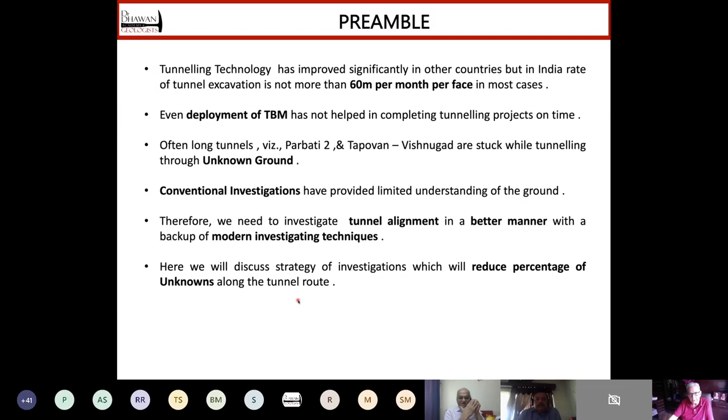You take any tunnel, you will find three prominent categories after you complete your geological investigations. Few reaches of tunnels will be well known to you. You would know what type of rocks are expected, what would be the jointing pattern in these stretches, and how they are going to behave. So these are the known areas, and we call them known knowns. These can be dealt with by good design and proper planning of excavation.

In the second category, in some reaches of tunnel, you would know the problem. Problem is known to you, but where it is going to occur is not known to you. These should be mitigated by appropriate contractual architecture.

But the third category is dangerous, where you neither know what would be the problem, nor you know where it will occur. And these are the most dangerous situations, and Parbati was under one such situation where water with very high ingress with lot of silt appeared suddenly, and the TBM got submerged.

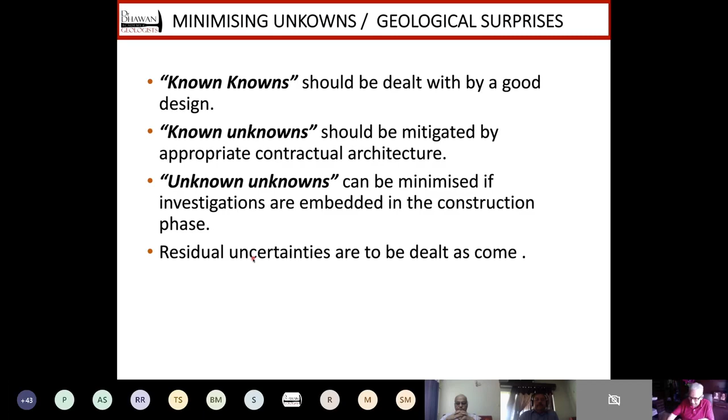Having understood what we are confronted with, I would like to give you through this picture an idea of where we start. This is a picture from Bhutan Himalayas, Chamkarchu project, which we investigated between 2010 and 2014. I was a member of the team who initially visited this, and this was the proposed tunnel alignment by us.

You will see the area is totally inaccessible. There is complex geology, which is very common to all parts of Himalayas. You can hardly see any rock outcrop. You cannot do deep investigative drillings because of poor accessibility; how will you take truck-mounted rigs? So there are problems and problems. So how to resolve them?

And you should really understand how scanty is the data based on which we try to prepare a geological section, and then we do rock mass classification, and from there we plan the entire excavation and support design of a tunnel. So therefore I say how little we know. So you can yourself understand, from 2 to 3% of rock outcrop, you are going to make 100% prediction of the geology along the tunnel alignment.

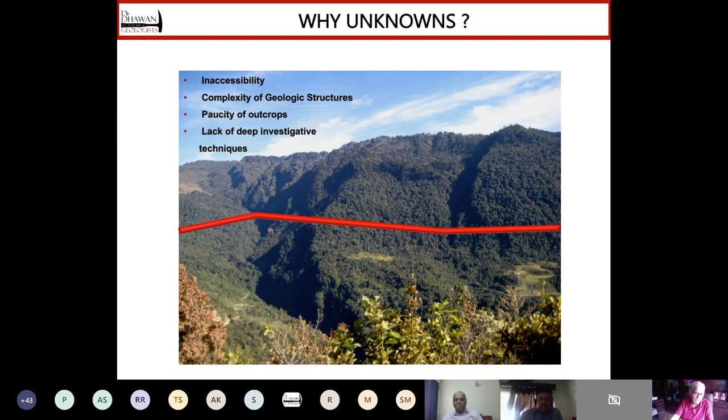From that kind of a hill, whatever outcrops you can measure or traverse, which are humanly possible to visit by a geologist or a group of geologists, you will try to interpret a geological section along a tunnel alignment, which will look something like this in every tunnel, where with these colored symbols we have defined types of rocks. We have also tried to understand the structural features, particularly thrusts or faults in Himalayas. There is a fold also you can see.

So even if my geological understanding through whatever mapping I have done is correct, I can estimate the type of rock which is going to be intercepted. Suppose my pointer indicates the tunnel alignment; you can estimate the type of geology, the type of rock along the proposed tunnel alignment. But within a particular rock, it is highly unlikely that it will be uniform throughout. There will be changes in the jointing pattern, joint spacing, nature of joints; then holistically the structure will change.

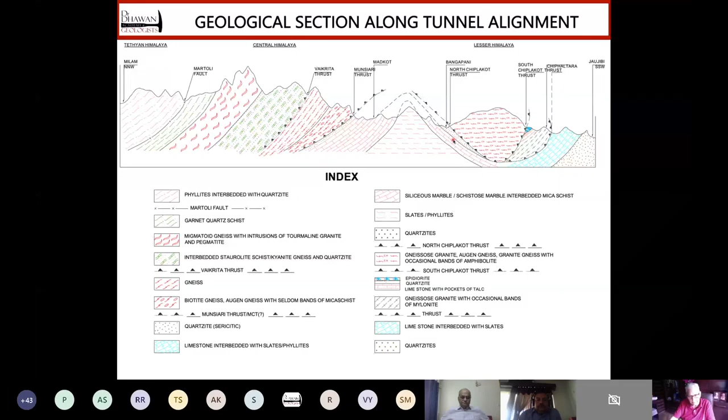Suppose this band of limestone on this limb of the fold would be different than the other limb of the fold. So geostructurally, these are different. So it is not appropriate to judge the behavior of a rock mass purely based on our geological assessment. We must bring the concept of geostructural unit into it.

Now, after doing our geological mapping and making the section, we conventionally make an attempt to understand the rock mass with help of some rock mass classification. For example, here in this case, it is RMR. You will see prominently there are two kinds of rocks, and for each sector, the geologist has done rock mass classification. So based on the outcrops which he has measured on the surface, which are very few in number, we are trying to predict behavior of rock mass in the entire reach, and we are trying to assess the rock mass classes in percentages through these pie diagrams for all the three sectors.

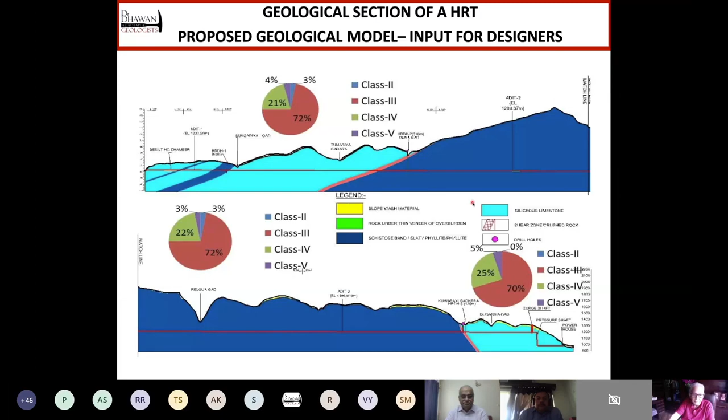So you can yourself imagine, when you construct the tunnel, excavate the tunnel, it will be a surprise if this kind of classification will totally come true.

Based on my experience, I divide the expected rock masses along a tunnel alignment into three categories equally. I mean, it is my own assessment that about 1/3 of the area falls into the known knowns, 1/3 in known unknowns, and the balance, unknown unknowns, is also 1/3.

What are the tools at our command? And what is the concept of investigation?

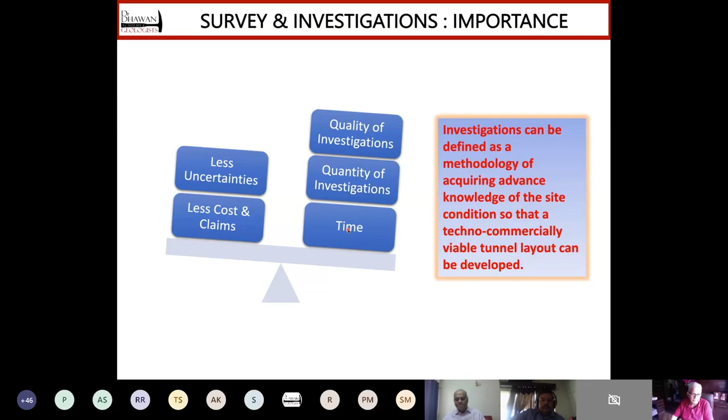And with this background, we can certainly say, and it's common sense, that if we do good quality investigations, adequate investigations, invest proper time and money on this, we will face less uncertainties and less cost claims. So why investigations? Or I should say, why do we need a strategy for investigations? To develop a dependable geological model. I showed you a section. That section, before we start making our DPR, should be very well frozen. And this will happen only after you develop a dependable geological model.

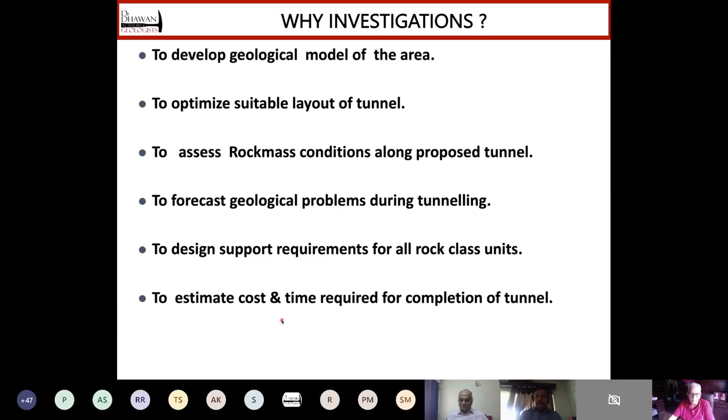If you have a good model, you can optimize the layout of the tunnel. And your assessment of rock mass conditions along the proposed tunnel will also be dependable to a certain extent. And our basic aim to do investigation is to forecast geological problems during tunneling. And finally, to design the support requirement for all rock class units which are expected. Once we do this, we will be in a position to prepare a dependable cost estimate and time required for completion of the tunnel. Not only that, we will be in a position to choose the right kind of technology for tunnel construction.

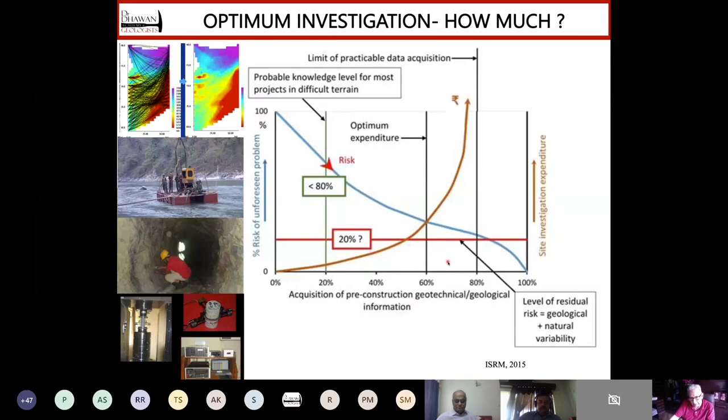And beyond this, you will find that the brown curve becomes steep initially and then almost vertical. So it means you can't cross beyond 80%, whatever you may do. It means 20% residual uncertainties will always be there. So that is the level of confidence on investigations. And therefore, initially you have to do a good investigation and then plan a contract in a manner so that you can intervene in between and there could be some mid-course correction. We'll talk about that.

Exploratory drilling, which is most important, is done, but minimum. In my opinion, in the Indian context, it is just lip sympathy, and we do some drilling only in low cover reaches, nala crossings, or where we anticipate a major geological problem. I have not seen any deep drilling for any tunneling project as yet. We do good drilling for dams and powerhouses, but not for tunnels. And then we apply some amount of geophysical investigation. We'll talk about it. And rock mechanics testing.

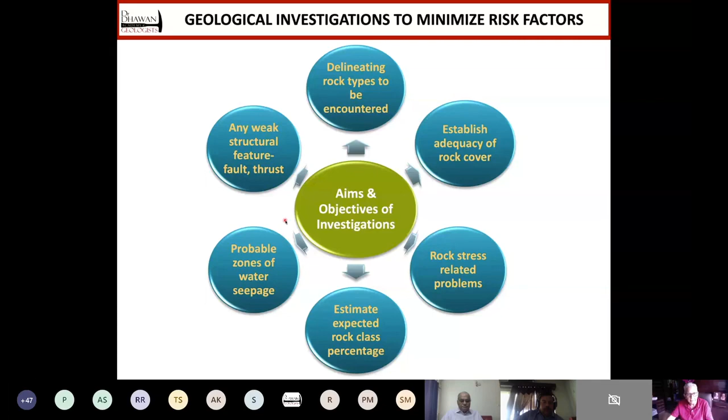The basic aim is to delineate the rock types, to establish adequate rock cover along the alignment, to estimate the rock stress, estimate expected rock classes along the tunnel alignment, probable zones of water seepage, and any other structural feature. So this is our aim, this had been our aim, and this will be our aim in future too. The only difference is more seriousness, or a systematic approach by integrating advanced techniques of investigation. What are these advanced techniques? LiDAR-based mapping. It is a quicker method, and particularly wherever the area is totally inaccessible, it is helpful.

Airborne geophysical surveys. These days, all NHAI contracts are asking for EM surveys, airborne geophysical surveys. We have yet to see results, but I'm very hopeful that this is a very, very important step for improving quality of investigations. Then the drilling, directional drilling, which can investigate the medium below the Nala beds, below the river crossings, in any kind of tough geological condition.

And one of the best examples which I know is the Gotthard tunnel in Switzerland, where a marl band, which was very thick, was investigated with help of about 1.5 kilometer long drill hole. And then during construction, tunnel seismic prediction system is very useful. In NHPC, where I initially served, we had been using it at several projects.

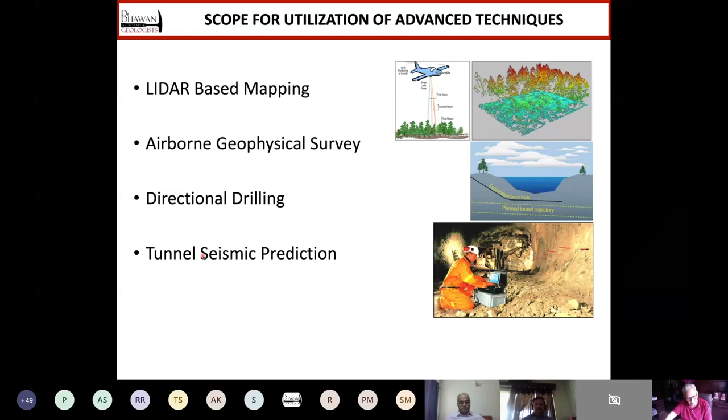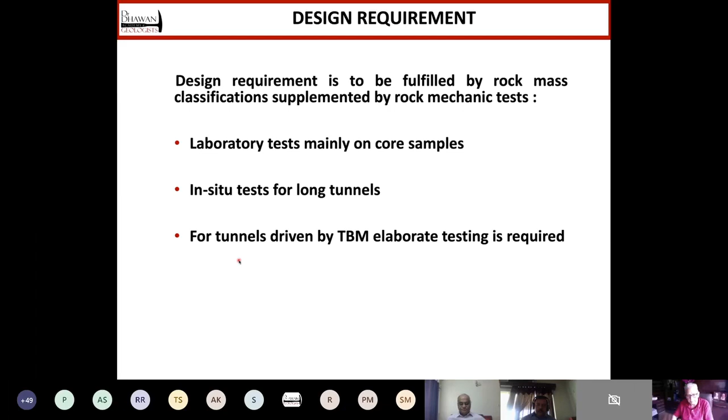To cater to the design requirement, we will have to do extensive laboratory tests, mainly on core samples, which we will either collect during the geological mapping or from the drill holes. In situ test for stress measurements along the long tunnels, and then if the tunnel is to be driven by TBM, elaborate rock mechanic testing is required.

While focusing on other investigating techniques, we should not forget RMR and Q system. There are so many others, but the Indian geologists are somehow more convinced with these two classification systems. These are very important tools, particularly during the investigations. And this is one tool which remains useful to you from preliminary state of geological mapping to the advanced state of geological mapping, tunnel stage, support stage design, and also during the construction.

Originally, these methods were designed for estimating tunnel supports, and later they were extended for assessing the rock mass properties as well. Nowadays, there are several empirical equations which help you to understand rock mechanic properties; if you know RMR or Q, you can assess C, phi, modulus, and other properties of rock mass. And both the classification systems provide a realistic estimate for numerical modeling purposes.

But my suggestion is that we should keep a check. We should try to correlate the values we get from RMR, Q or Geological Strength Index, GSI, which is established by Hoek, with the actual rock mechanic testing program, so that our estimates do not go haywire. So some amount of testing is required during the DPR stage, so that we can use those figures for our designs.

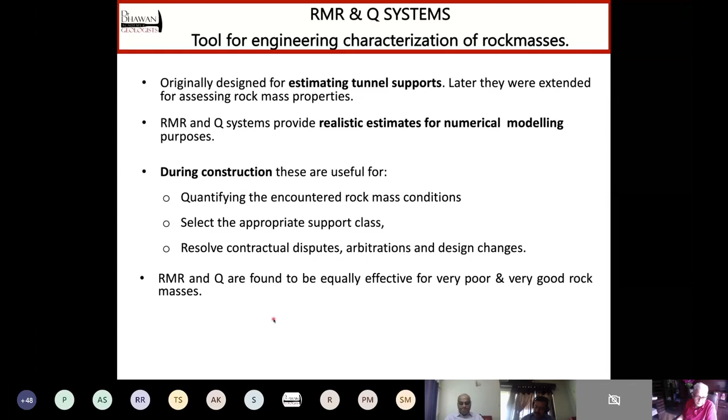And both the methods are useful even during construction of the tunnels for quantifying the encountered rock mass conditions, select the appropriate support class, resolve contractual disputes, arbitration, and design changes. Many times people ask which one is better, RMR or Q? I think this question was asked to Barton and Bieniawski both. So both have written a paper in 2008, wherein they have stated that RMR and Q are found to be equally effective for very poor and very good rock masses. So for the entire range of rock mass, these are useful.

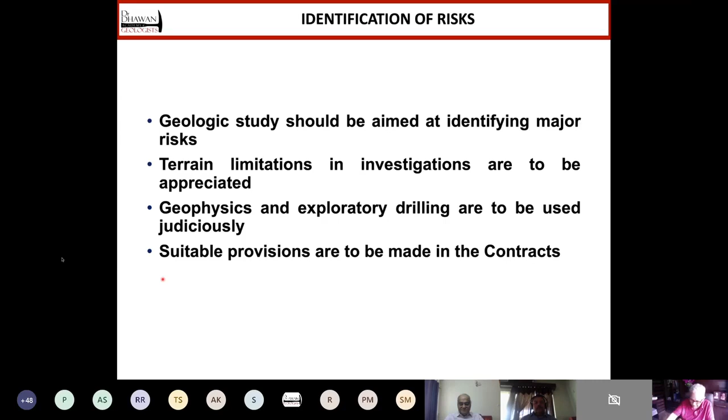So now the risk identification and management. Geological study should be aimed at identifying major risks, but at the same time, terrain limitations in investigations are to be appreciated. Geophysics and exploratory drilling is to be used judiciously, and suitable provisions are to be made in the contract. These are the four, you can say, mantras for risk identification. And we must do it before we start construction.

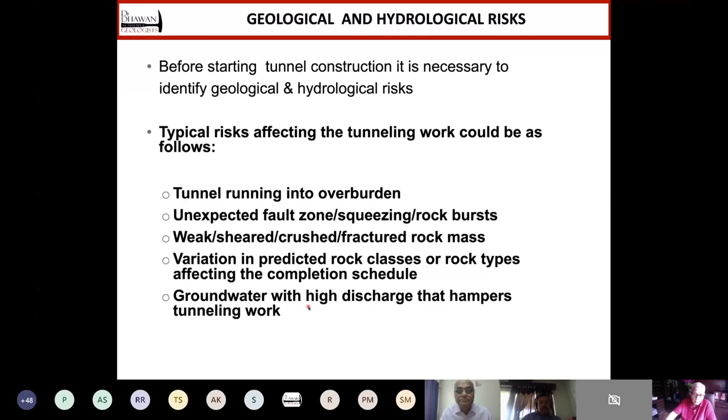We should identify geological and hydrological risks. And these two things are to be done only with a backup of good geological data, which emerges from good geological mapping. And the typical risks which I have seen in most of the tunnels are tunnels running into the overburden, unexpected fault zones, squeezing rock zones or rock bursts, weak, sheared, crushed, fractured rock masses, variation in predicted rock classes or rock types affecting the completion schedule, and the groundwater with high discharge that hampers tunneling work. And particularly, it is the enemy of those tunnels where TBMs are deployed.

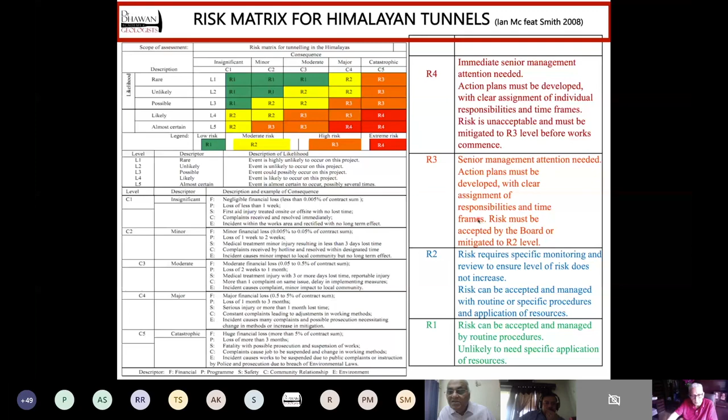Then you will see that in this matrix, we have 4 colors: green, yellow, orange, and red. Obviously, green is of very low intensity and red is the most severe intensity. After identifying from R1 to R4, he has given an action plan for R1, R2, R3, and R4 separately. Because of time constraints, it will be difficult for me to discuss each risk category, but certainly those who are interested will find this in literature.

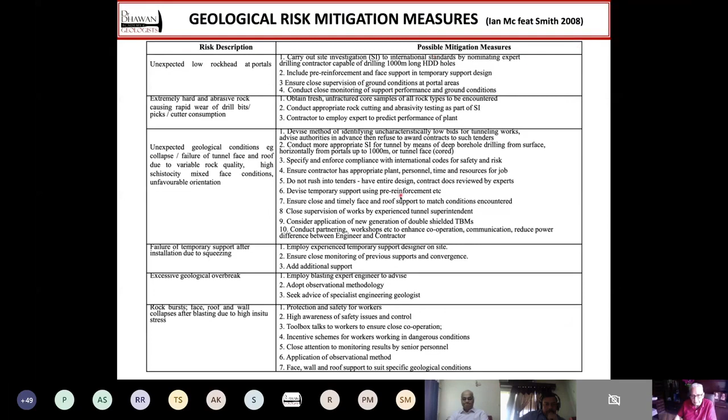And then he has given the risk mitigation measures also. He has classified various kinds of risks and given possible mitigation measures, which are very elaborate and self-explanatory. You can read his paper and find this. Now, what should be our strategy?

As I showed you the picture of a project in Bhutan, luckily I was heading the team in 2010 who initially visited it. That reconnaissance visit in the early stage was very useful to us. Reconnaissance visits in early stages matter, because with an experienced team you can rule out certain nuisance areas just while walking through the terrain.

In case of a hydropower project, you can eliminate more than half of the problems if your regional geological setup is known to you during reconnaissance. So it helps to avoid problematic areas. You must carry topo sheets and the backup of remote sensing studies at that time.

Regional geological maps: luckily, once again, in the Indian context, GSI has prepared geological maps for almost all areas, maybe up to 98% of areas geologically covered. We have geological maps on either 1:50,000 or 1:25,000 scale. So these are very useful to us.

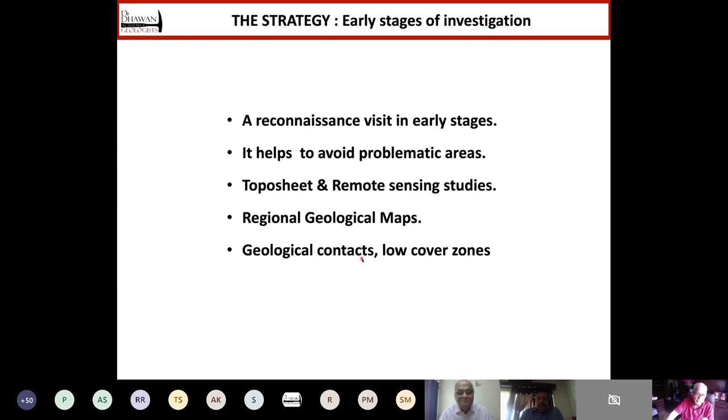And if we have a peep into the literature made available to us by universities and researchers, we can estimate the geological contacts and the reasons why the low cover zones in a particular area have developed. So this is strategy number 1, prior to starting investigation.

After that, we must plan airborne EM surveys, or in low cover reaches we can use seismic refraction and resistivity profiling and imaging, because drilling was not possible at all places in every project. To me, this has really been very useful in estimating the geological situations in the low cover reaches.

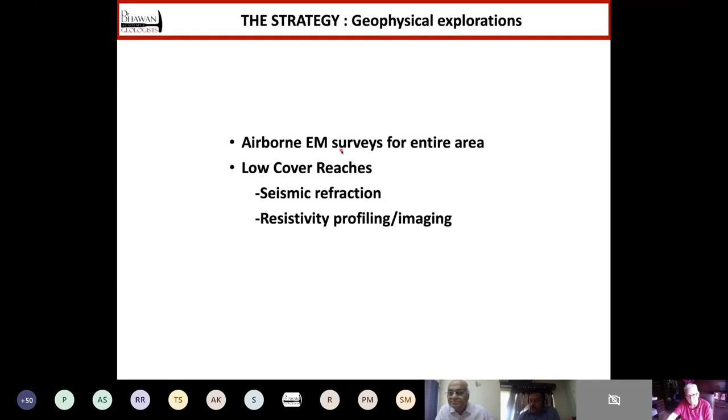I'm not aware what the results are of the EM surveys being done nowadays for several tunnels being planned by NHAI. So this much understanding needs to be developed even before we start investigation during the feasibility stage.

In the feasibility stage, we should do engineering geological mapping, that is EGM, on a minimum 1:5,000 scale. Integrate this EGM with geology, geophysical results, remote sensing data, and whatever is at your command. The overall geological model is developed in this stage, and rock mass types expected in the tunnel are identified.

Geological contacts are established, rather reaffirmed. Whatever you had estimated based on your regional geological understanding is to be firmed up. Then a lot of rock mechanics testing and petrology of various rock units is to be done, and if required, some short holes should also be drilled.

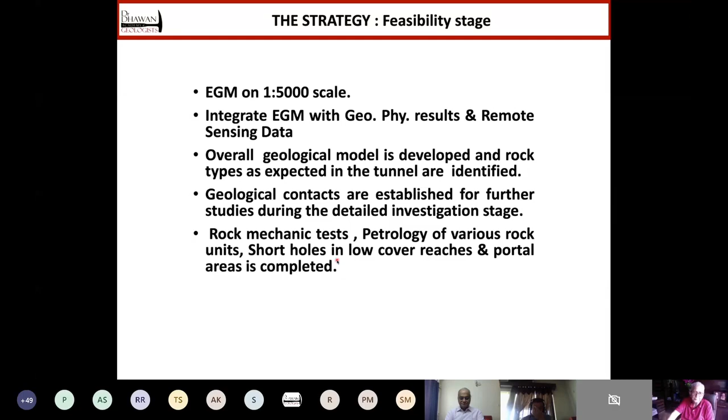During the detailed geological investigations, we need to do geological and geotechnical mapping, reinterpretation in light of fresh data, integrating results of exploratory drilling and rock mechanics testing. This is the stage when you should plan whether you should have a deep drill hole or a directional drill hole. And this is the stage when geotechnical assessment of rock mass classification is developed for each geostructural unit.

Rock mass classification for known conditions greatly helps in estimating the rock supports or treatment required in those areas. Risk assessment is done with special attention to major lineaments, fracture zones, shear zones, nallah crossings, and unexpected geohydrological conditions. Then poor rock mass zones should be confirmed by deep drilling or directional drilling, as I have just said.

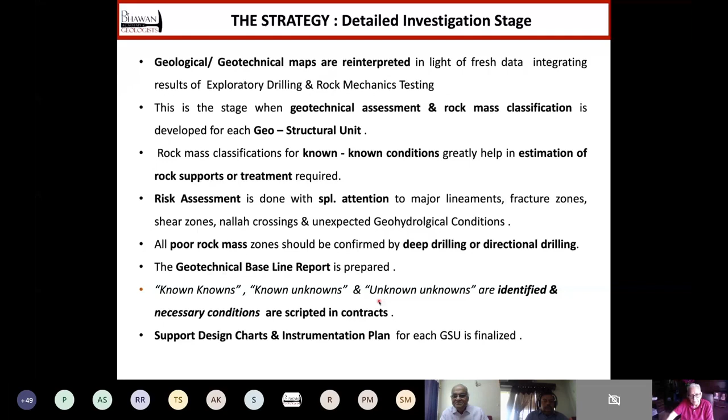Finally, all this data is to be synthesized in a geotechnical baseline report, and this should be separated from your DPR concepts. At this stage, you would know how much we know along the tunnel, how many known unknowns are there, and how much area is still unknown to us. These will be identified. If you have that, then support design charts and an instrumentation plan for each geostructural unit can be finalized. To synthesize everything, I will just take a minute.

I think, yes, I'm running into my last minute now.

This is a flow chart which I developed during my PhD, which was on rock mass quality parameters and tunnel supports for Himalayan tunnels. In the central column, whatever geological mapping, data acquisition, rock mechanics testing, remote sensing, geophysics, and other techniques you have applied is the source. This becomes the source of analysis for everything.

In short, the central column takes you to support design by empirical methods, that is rock mass classification. On the left-hand side, you take out the discontinuity data and apply software like DIPS and UNWEDGE to get an idea about the structurally unstable zones.

On the right-hand side, from general parameters such as rock strength and how much rock cover there is, you will come to know whether there is any chance of stress failure or not. If you integrate all this, you will optimize your tunnel support requirements.

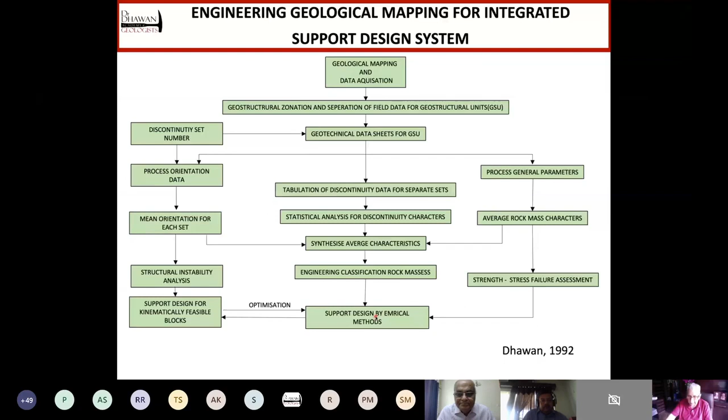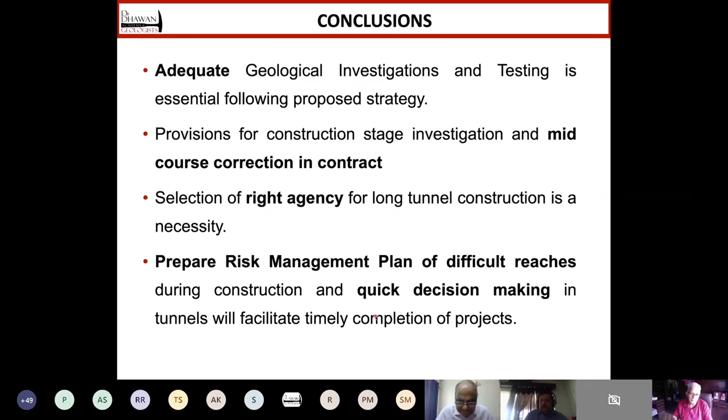With this, I would conclude in a few words: do adequate investigations, keep ways for mid-course correction, select the right agency, prepare for the worst kind of risk, and prepare a good risk management plan for difficult reaches.

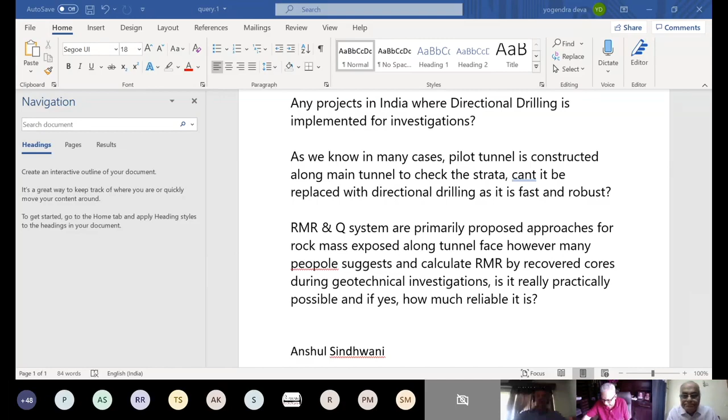The question is from Mr. A.K. Mehrotra: how is a known unknown converted to a known known by strategic planning, and at what stage? Once again, a good question. You see, after geological mapping, by good outcrop survey and a very sincere effort by a team of geologists, you will have some confidence for certain areas along the reach of the tunnel that I cannot go wrong in this area. I will get limestone and I have 3 or 4 geostructural units in limestone.

But there will be some areas where you will apprehend that in the limestone rock mass, I have some shear zones. I really do not know what are the proper RDs where these thick shear zones are going to intersect, or to add insult to injury, whether there will be some amount of groundwater appearing through these shear zones. So the right stage is the detailed investigation stage where it should be unearthed.

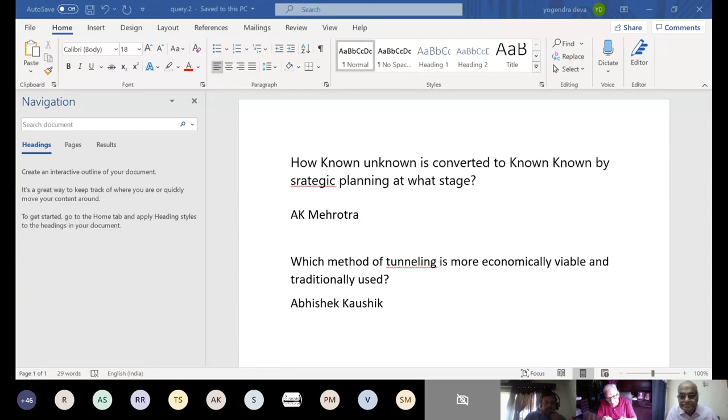The right technology is a mixture of geophysics, but geophysics has certain limitations. It cannot be applied everywhere. It will depend upon the terrain, the topography, and also upon the problem you are dealing with, what kind of technique you can apply, or several techniques together can be applied. And if you can investigate these areas by some medium depth drill holes, targeting those weak zones, that will also help you to convert the unknowns to knowns.

So your question is how known unknown is to be converted to known known. So once we know the location of this unknown, then known unknown is converted into known known. I hope, Mr. Mehrotra, I have given you the answer. I do not know whether you are satisfied or not.

Abhishek Kaushik is asking, which method of tunneling is more economically viable? Yes, sir, I am satisfied, sir. Satisfied. Thank you very much. Thank you.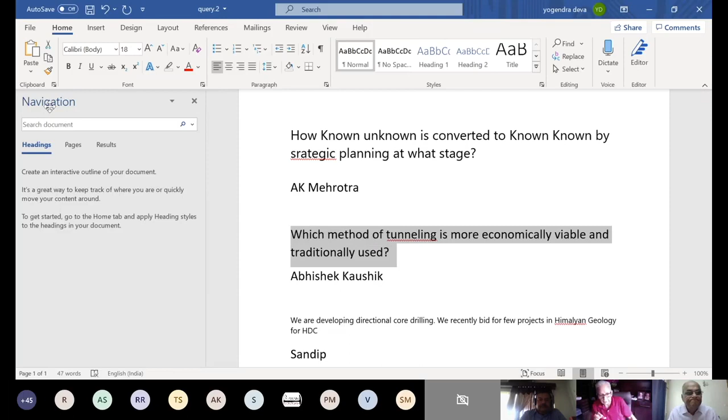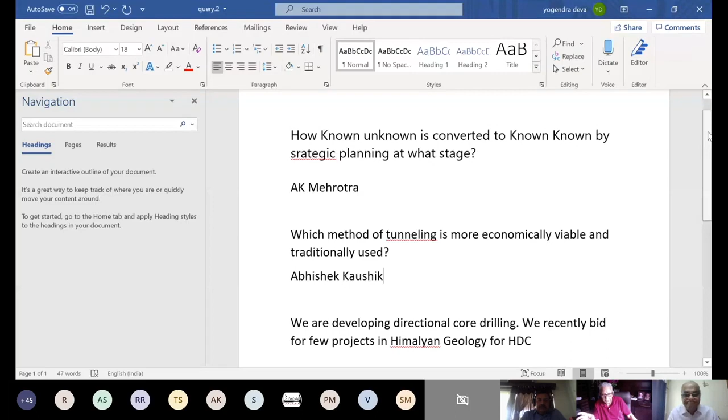Which method of tunneling is more economically viable and traditionally used? I think, Abhishek, you wish to ask whether the drilling and blasting method or TBM method. These are the two main types which we normally use. And within DBM, whether we are using NATM method or something in between. So in my opinion, both the methods are good.

TBM basically in the Himalayas has been applied if we can't find extra entries into the tunnel, if we can't find additional adits, because our thumb rule is to limit tunneling per face by conventional methods of DBM to about 2.5 kilometers per face. If it is more than that and we can't find intermediate access, then we go for TBM. But it has to be decided in conjunction with geology and so many other things.

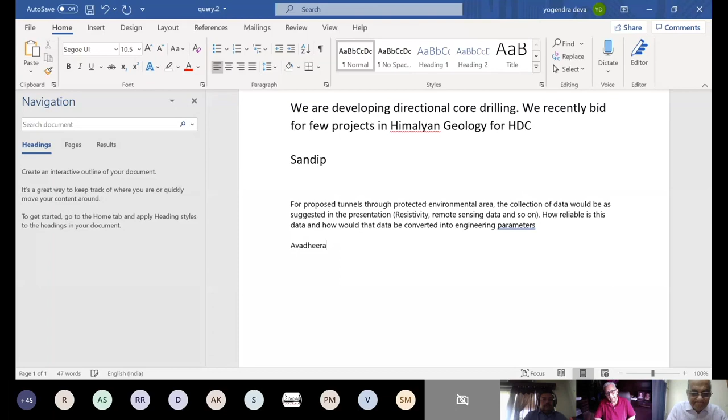I mean, I don't have a ready-made answer in support of any of the methods. All methods are good, but the only thing is how seriously you adopt a method and how seriously you do your work, that is more important.

We are developing directional core drilling. We recently bid for a few projects in Himalayan geology. for HDC. Sandip, I would be very much interested to speak to you. Maybe after our webinar, please get in touch with me. My email and telephone number will be displayed. Sure. Thanks. Okay. Thank you. Okay, thank you.

For proposed tunnels through protected environmental areas, the collection of data would be as suggested in the presentation, resistivity, remote sensing, and so on. How reliable is this data, and how would the data be converted into engineering parameters? A tough question, because you have said environmentally protected areas. First of all, as far as I know, in such areas, total entry is banned.

So you can have a broad geological model based on regional geological mapping or some remote sensing studies, and some airborne geophysics can also be done. But for assessment of the rock mass characters, which are required for RMR and Q, I mean rock strength, joint spacing, aperture, and so on, you have to have some sample outcrops.

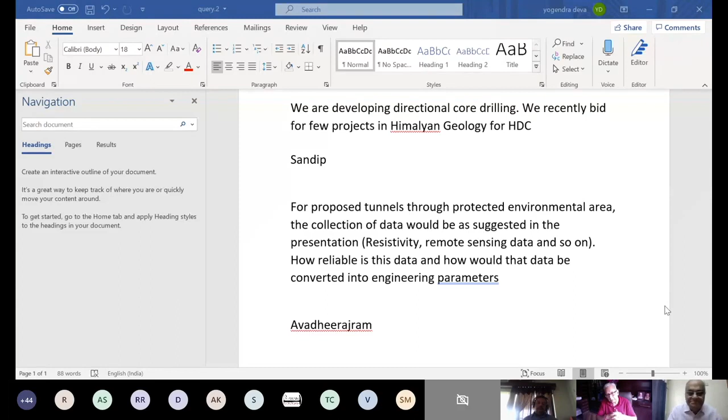And as far as I understand, normally you will not get permission for doing any project in India in such areas. But in case you get it, first of all, you will have to apply for doing investigation in such areas. With my background of mineral exploration, which I did for about 5 years as CMD of Mineral Exploration Corporation, MECL, we used to take a special approval for doing investigation in environmentally protected or reserve forest areas.

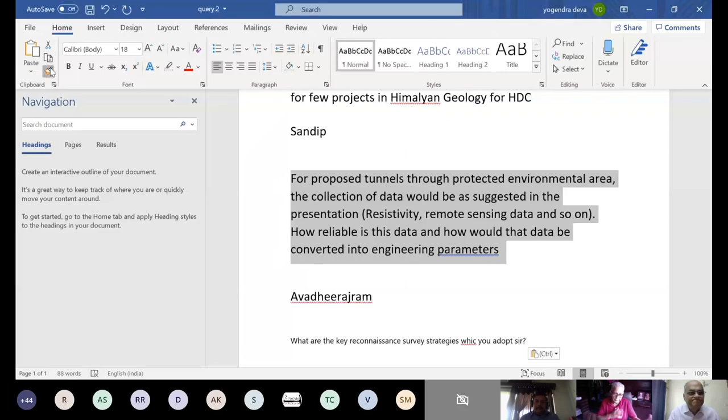If you are lucky, then you can proceed further. Otherwise, there is no indirect method to convert all this information into engineering parameters. Some conversion can be done, but not very reliably. So this is the answer to you, Mr. Avadheerajram.

And the next question is... Mr. Dhawan, if I may interrupt, this is the last query, and you have got 2 minutes to finish this. Thank you very much. Okay, sir. Okay, I'm very lucky in that case.

So this is once again from Mr. Kaushik. What are the key reconnaissance survey strategies which you will adopt, sir?

So reconnaissance, of course, if I say the stages of reconnaissance: take Survey of India topo sheets, go to Google Maps, which are readily available, take good imageries before you go to site, but nothing can replace the actual traversing of the ground. So this is the prescription for you, Kaushik. So with this, I think I have answered this question, Devasap.